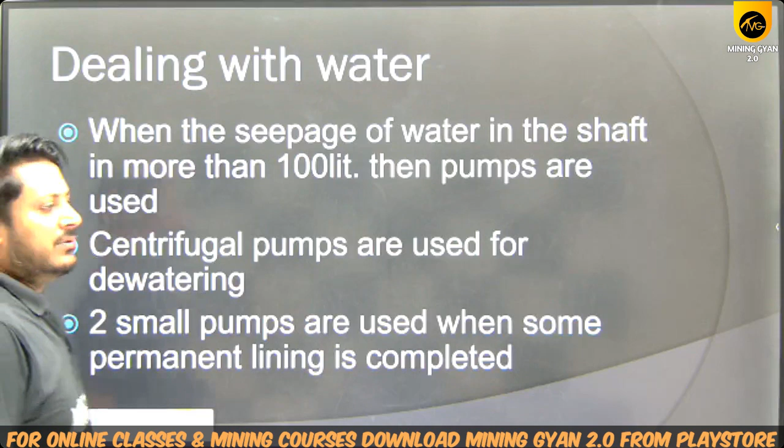So first, our topic today is dealing with water, because water is a major problem which arises during the shaft sinking process. We have to deal with the water while shaft sinking, and for that we have to set up pumps. So what is the condition when we have to set up pumps?

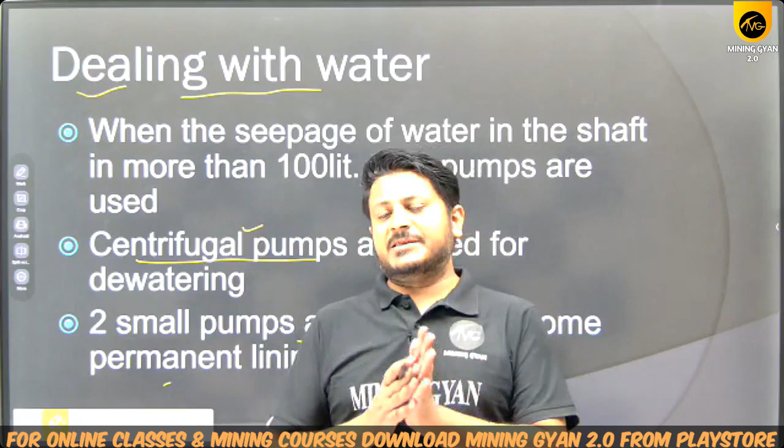If the permanent lining is completed, then in that case two small pumps are used. The pump which is used for dewatering purpose is basically an 8-stage pump, and during the sinking process only 1 or 2 stages of this pump are being utilized.

During sinking, only 1 to 2 stages are utilized out of the 8 stages; the remaining stages are not utilized at that time. The remaining stages are being utilized later on.

Now if we talk about ventilation, what quantity of air must be provided during shaft sinking? It is said that we have to use a forcing fan. We must use a forcing fan of 300 cubic meter per minute capacity, which shall be used during shaft sinking for ventilation purposes.

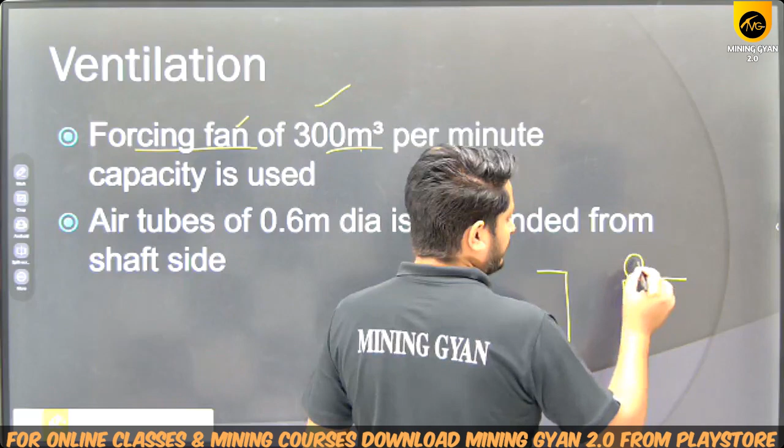From this forcing fan you will provide an air duct, or air tube, for directing the air till the bottom of the shaft. Okay, this will be your whole construction.

Now in shaft sinking we have applied strategies for dealing with the water. The second thing, we have applied strategies for dealing with the ventilation. Now we have to deal with the lighting also, because as the depth of the shaft increases, there will be less quantity of light available at the bottom of the shaft.

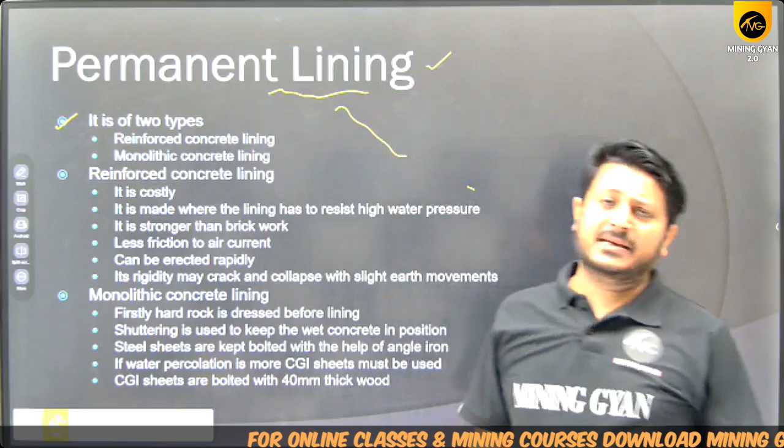Here your permanent lining is basically of two types: reinforced concrete lining and the monolithic concrete lining.

If we talk about the reinforced concrete lining, it is basically very costly. This type of concrete lining, reinforced concrete lining, is basically made in the areas where the make of water is very high and your lining has to resist the high pressure of the water. In such places only this type of concrete lining is made.

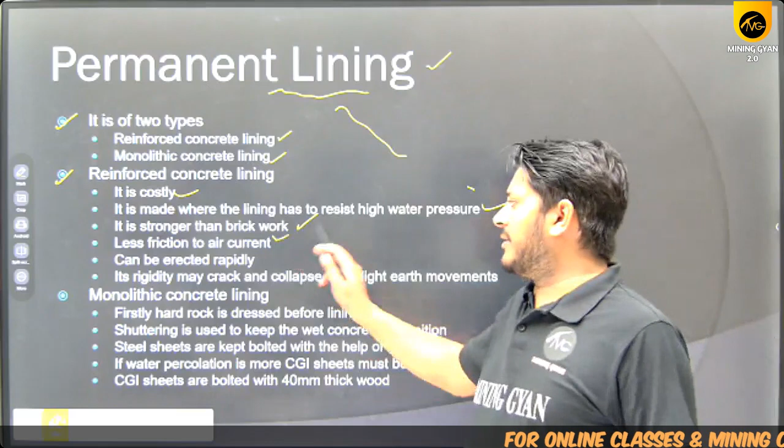After that, it provides less friction to the air current. If the friction to the air current is more, then less quantity of air will reach the bottom of the shaft or the districts after that.

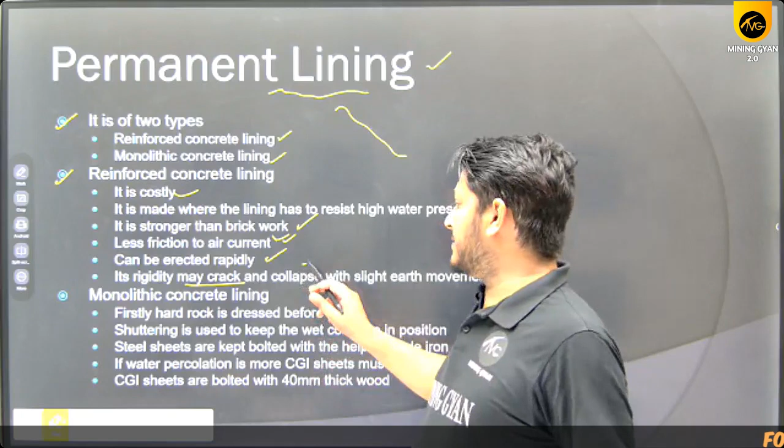But it has a demerit, that it may crack because of its rigidity. It's so strong that cracks can generate in it and it may collapse with slight earth movements.

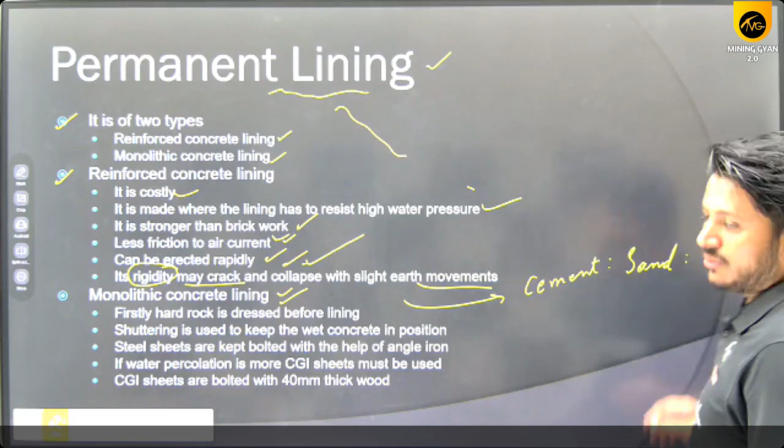Cement, sand, and coarse aggregate are used for the dry shafts. The quantity of these three is mixed in the ratio 1:2:4 to make a slurry, which is then used for the concrete lining or permanent lining.

Talking about the procedure, first the hard rock is dressed before lining, and shuttering is used to keep the wet concrete in position.

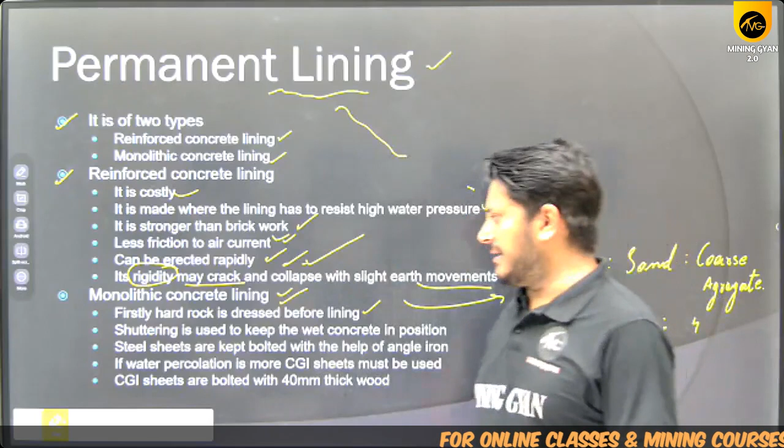Imagine the pillars constructed at your house. In the pillars we provide shuttering, which are basically iron plates. They are used to hold the concrete at its position, holding the concrete in its position.

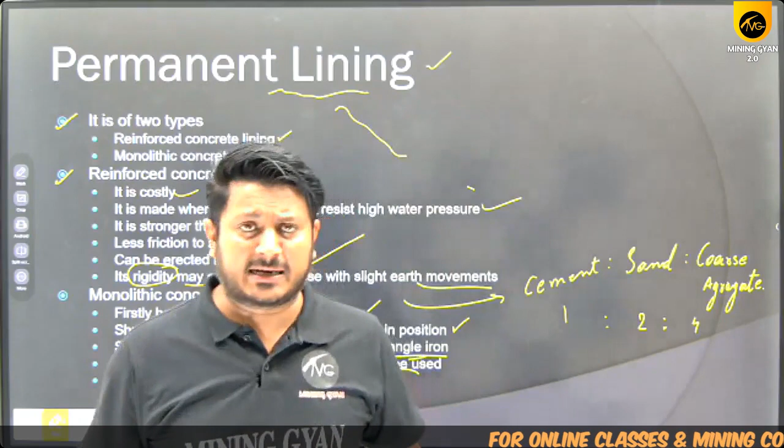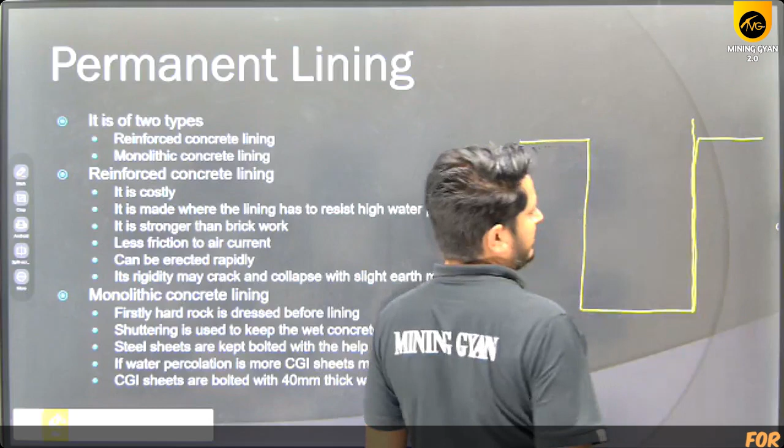Now it is like this. If I draw the diagram, it is something like this. This is your shaft. First of all, a layer of CGI sheet is put over here like this - this is your CGI sheet.

After that, we used to keep the wooden layer - we will provide a thick wood layering, to keep the CGI sheet in its position.

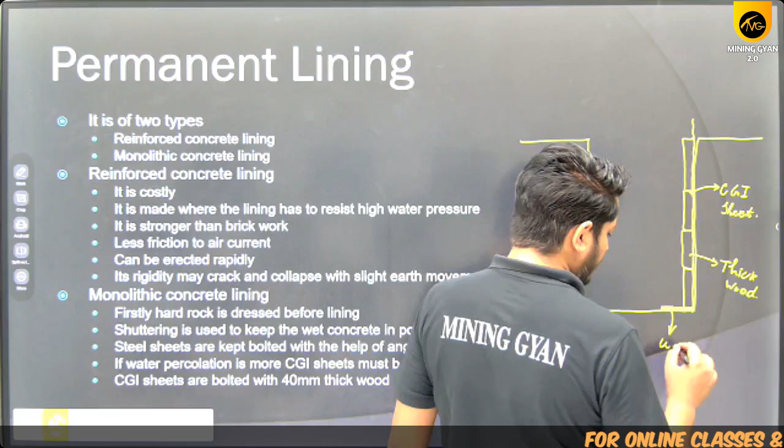After that, we will provide a wedge plate over here. This wedge plate will keep the whole arrangement in position. This will be at the bottom and it will hold the whole arrangement, which will be made on it, above it.

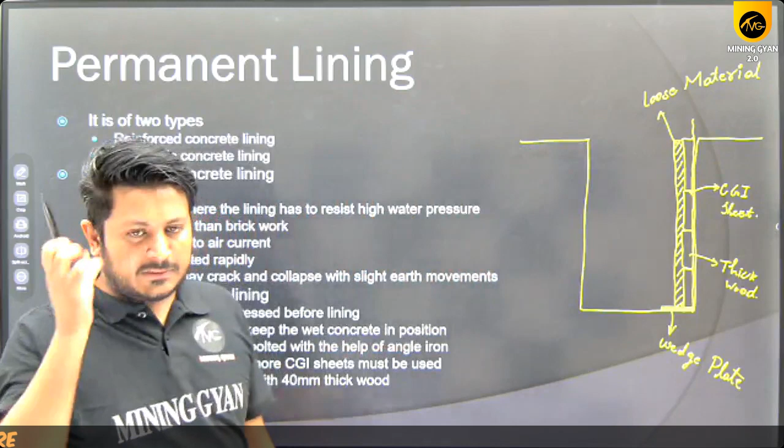Now we will provide the loose material, filling the space with loose material. After that, cement - that is cement, sand, and aggregate. All these things are kept here, and shuttering is provided along the outer portion.

This is your shuttering, and this is your cement. This is the whole arrangement for the permanent lining, the monolithic concrete lining.

Now we have to study about the cast iron tubbing. Would you like to see the cast iron tubbing? This is the cast iron tubbing, or the German tubbing plate. This is a type of plate used during shaft sinking to provide a permanent lining.

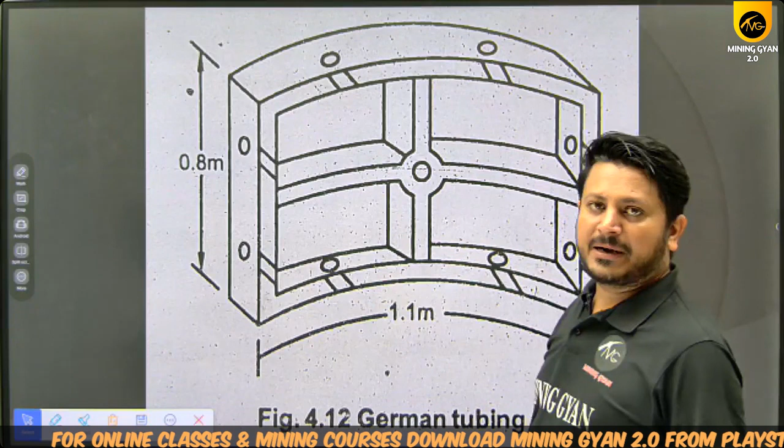This is also a type of permanent lining used in the mines. The portion you are seeing here is the only portion attached on the sides of the shaft, and you can see these holes too. These holes are for the bolting purpose, and this hole is for injecting cement behind the cast iron tubbing.

Cast iron tubbing is also known as German tubbing, and also known as cast iron lining. It is basically a permanent water tight lining.

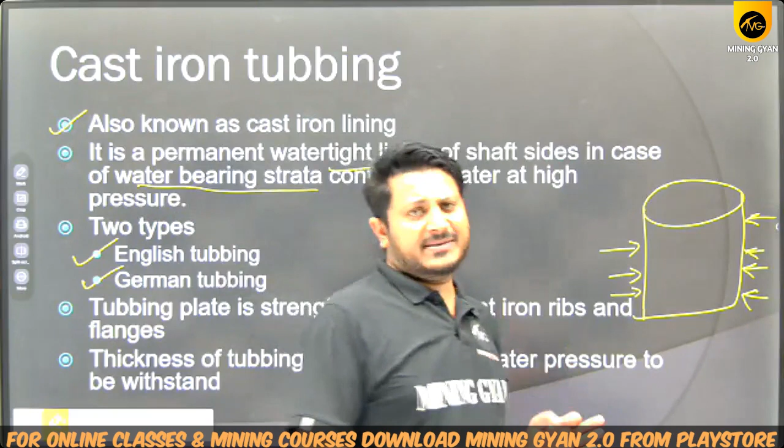Now if we talk about the thickness of the tubbing, then the thickness of the tubbing depends on the water pressure which it has to withstand.

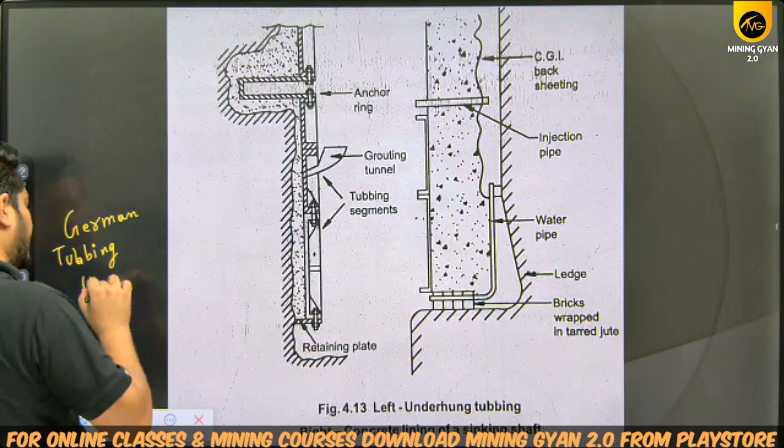Now we have to construct German tubbing in the upward direction. We have to construct the German tubbing for the upward direction, German tubbing upwards.

For this construction, first of all, we have to make a strong level ground. We have to prepare a strong level ground.

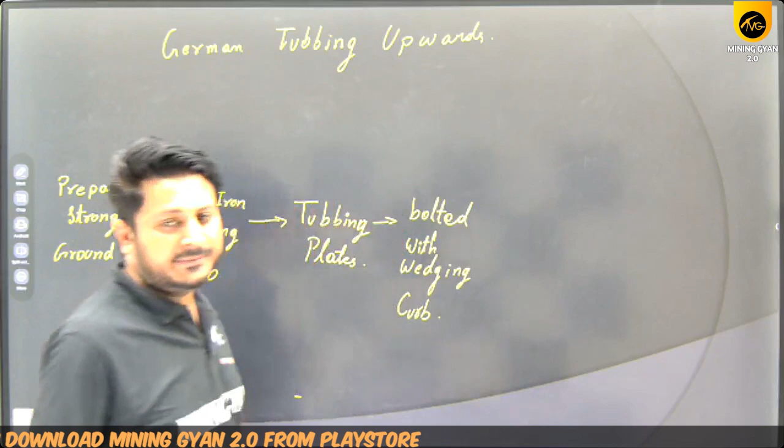Now this is the complete process of placing the cast iron tubbing, German tubbing in the upward direction. For this purpose, after completing one ring, you have to check the center line.

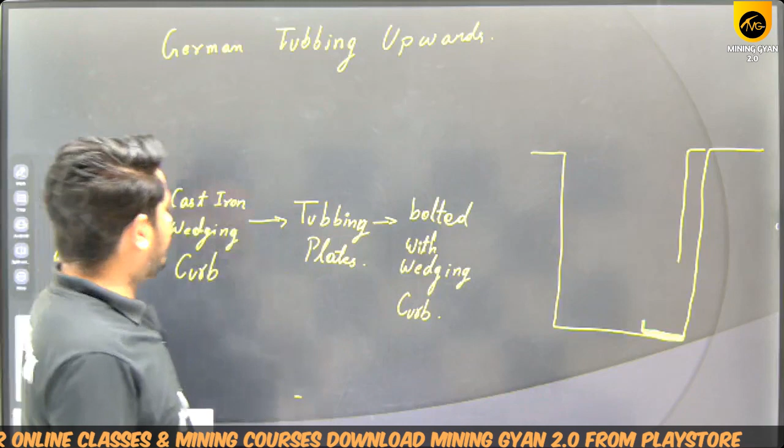We will place a wedging curb over it like this, and on the wedging curb we will place our tubbing plates. In this similar manner, we will complete our one ring.

After that, we will match it, then again we will do the bolting and place another tubbing plate over it. Then again bolting, and another tubbing plate. In this manner, we will complete this whole procedure.

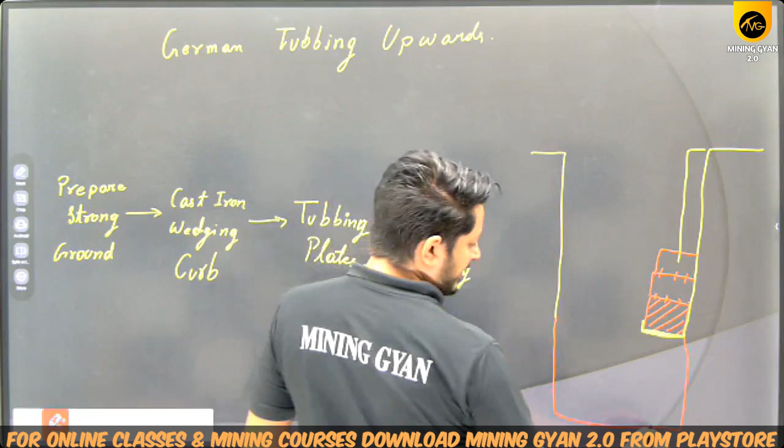After that, we will proceed further and go to more depth, and after that again we will prepare a ground and follow the similar procedure.

अब यहाँ पर हम क्या कर रहे हैं, एक हमने ग्राउंड बनाया, लेवल ग्राउंड, उसके ऊपर वेजिंग कर्व डाला, वेजिंग कर्व के ऊपर टबिंग प्लेट्स को जमा दिया। जैसे ही ये पूरा कंप्लीट हो जाता है तो फिर उसके बाद हम फिर से शाफ्ट सिंकिंग करते हैं। After that we will provide temporary lining, and after we have reached a particular depth, we will again follow the same procedure as done earlier. In this manner you can do the upward direction German tubbing construction.

Now, after every 20 meters interval, extra curb is provided. It depends basically, if you are providing the extra curb, on the nature of the strata.

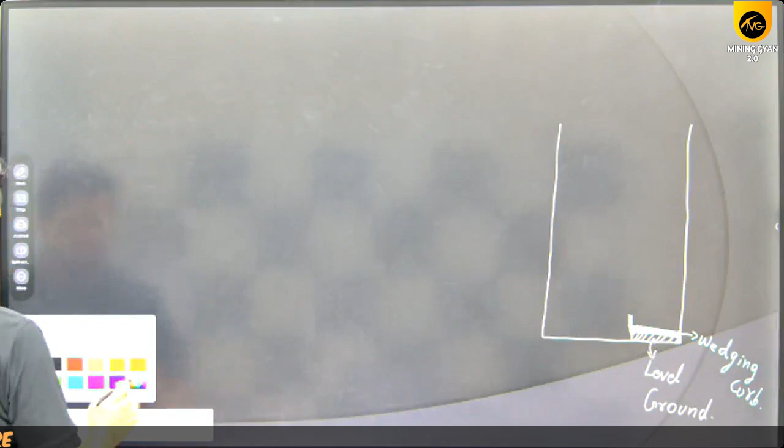Level ground. After that, this is your wedging curb. German tubbing. Similarly, all the German tubbings are placed one above the other by bolting.

After a 20-meter interval, we will provide the wedging curb again for extra support. This 20-meter interval distance depends on the nature of the strata. Remember this thing.

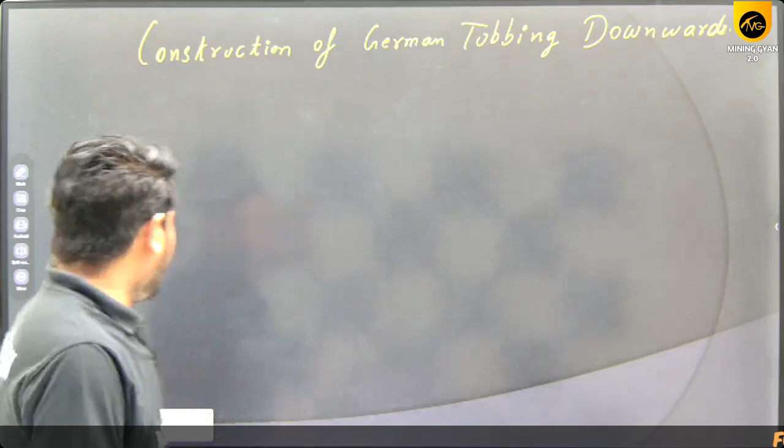यहाँ पर इन्वर्टेड वेजिंग कर्व या फिर जो एंकरेज रिंग है उसको लगाया जाता है, टबिंग को उससे सस्पेंड कर दिया जाता है. अब यहाँ पर मैं एक डायग्राम दिखाता हूं. ये देखिए,

यहां पे फर्स्ट ऑफ ऑल आप एक इन्वर्टेड एंकरेज रिंग लगाएंगे। इन्वर्टेड जो है वो वेजिंग कर्व लगाते हैं या उसको एंकरेज रिंग भी कहा जाता है। दिस इज योर इन्वर्टेड, ये है एंकरेज रिंग। अब इस एंकरेज रिंग की मदद से, जो मेरा जर्मन टबिंग है, उसे यहाँ पे बोल्ट की मदद से अटैच करके इस प्रकार लटका दिया।

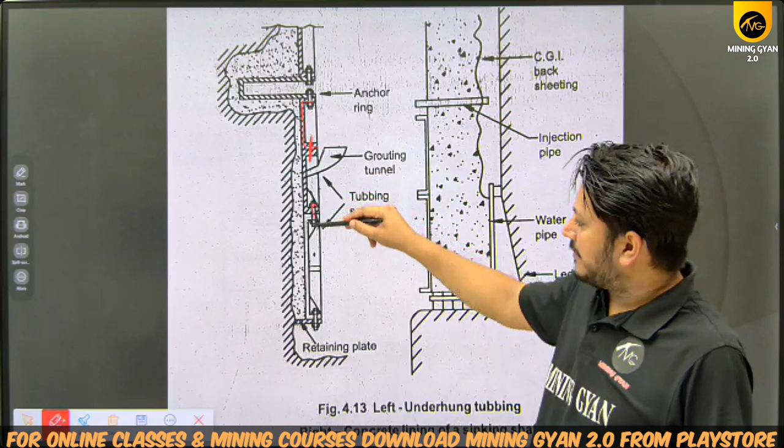एंकरेज रिंग डाला पहले शाफ्ट के साइड्स में। First in the shaft sides I have inserted the anchorage ring. After that I will do the bolting of the German tubbing segment with this anchorage ring, and after that two German tubbings will be bolted together. In this manner these German tubbings will be bolted together, and finally I will insert a retaining plate in the shaft side, and on that retaining plate the last German tubbing plate will be joined with the help of the bolt, the bolting system.

तो यहां पर हम एक इन्वर्टेड एंकरेज रिंग डालते हैं जो कि इसके अंदर पूरी तरह से घुस जाता है, इस तरीके का कुछ दिखाई देता है। अब इससे जो मेरा जर्मन टबिंग है उसको बोल्टिंग करके लटका दूंगा, ऐसे लटकता हुआ एक दूसरे से चला जाएगा। पहले तो एंकरेज रिंग से जुड़ा रहेगा, उसके बाद एक दूसरे से बोल्टिंग करके इनको अटैच कर दूंगा। फिर फाइनली नीचे एक्स्ट्रा सपोर्ट के लिए retaining plate is placed or inserted into the shaft side, and this will support the whole system.

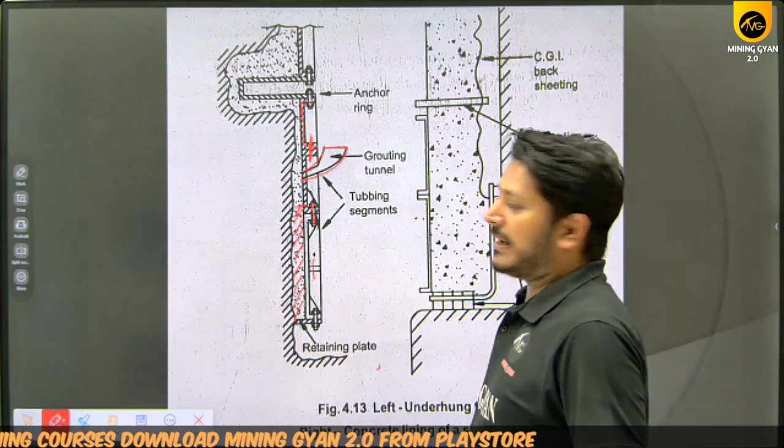Now in this German tubbing segment I will place a grouting funnel. This grouting funnel will fill the gap between the German tubbing and the undulating shaft side. This gap will be filled with the help of the grouting funnel. So the tubbing is suspended with the anchorage ring, and after that finally it is supported from the bottom with the help of the retaining plate.

The distance which is maintained from the shaft bottom is approximately 1.2 meter to 1.8 meter. This distance is constantly maintained from the shaft bottom. Now which thing is used to fill this gap? Here the thing which is used to fill this gap is the cement, for extra support.

Okay, cement is filled over here.

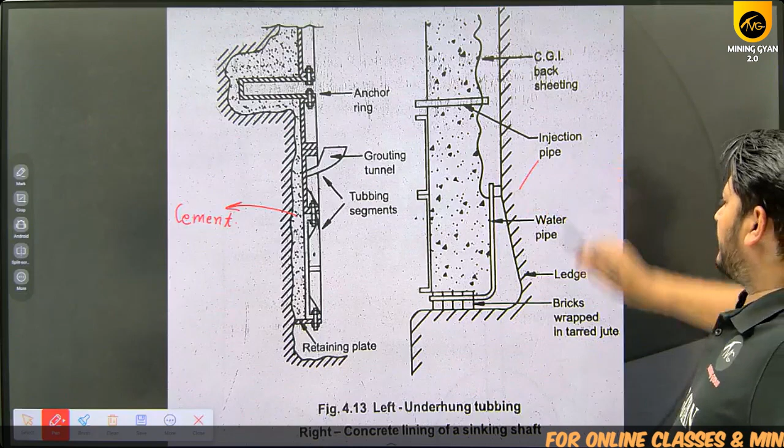This is the concrete lining of shaft sinking, where CGI sheet is placed. After that, shuttering is done, and the gap is filled with cement with the help of an injection pipe. This is your shuttering, and at the bottom, this is your ground, and behind the permanent lining a water pipe is placed. From this water pipe, all the water which gets percolated behind the CGI sheeting comes out and goes to the shaft bottom.

ठीक है, अब यहाँ पर हमने जो पढ़ा था शाफ्ट सिंकिंग में कंक्रीट लाइनिंग, तो सीजीआई शीट लगाया, उसके बाद शटरिंग लगाया और बीच में पूरा मटेरियल भर दिया, यहाँ पे वाटर पाइप प्रोवाइड किया ताकि जो भी वाटर प्रेशर क्रिएट होता है वो रिलीज होता रहे, और वाटर लगातार यहाँ से शाफ्ट के बॉटम में चला जाता है।

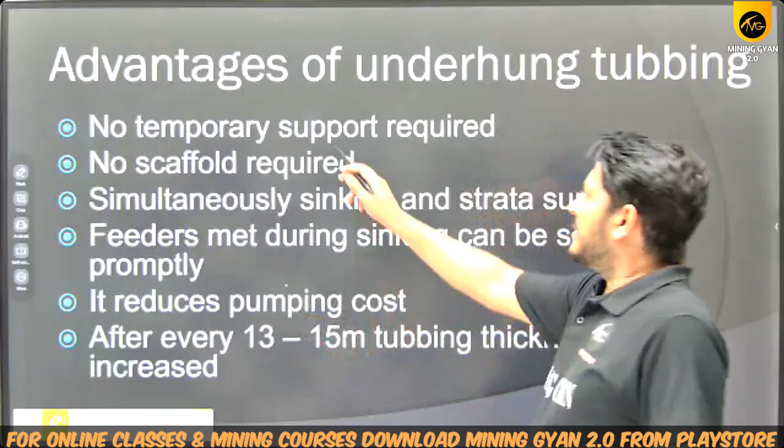एंड एडवांटेजेस ऑफ अंडरहंग टबिंग। अंडरहंग टबिंग के एडवांटेजेस क्या है? सबसे पहला एडवांटेज ये है कि इसके लिए आपको किसी प्रकार का टेम्पररी सपोर्ट की जरूरत नहीं पड़ती है। In underhung tubbing, we do not need to provide any type of temporary support, it is not required.

Scaffold is not required. Simultaneous sinking and strata support is possible in this case, मतलब कि जो सिंकिंग कर रहे हो शाफ्ट की, वो और साथ-साथ में जो सपोर्टिंग का काम है, वो दोनों एक साथ हो सकता है।

ठीक है, अब जो भी आपके फीडर्स मिलते हैं, व्हाट डू मीन बाय फीडर्स? The cracks from where the water gets percolated in large quantity, you can seal those feeders at the time of shaft sinking only, and it reduces the pumping cost. If you are sealing these feeders, your pumping cost will get reduced, and after every 13 to 15 meters of tubbing, the thickness of the tubbing is increased. You have to remember this thing.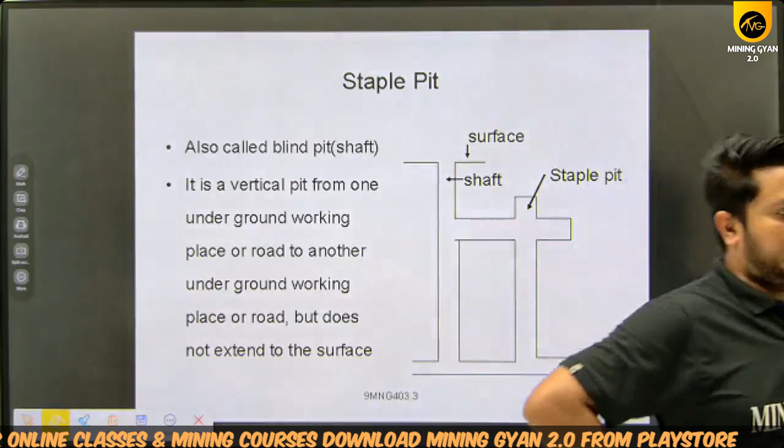अब देखिए, upward drivage of shaft - you have to drive the shaft in the upward direction. Basically, upward drivage of shaft is done in metal mines only. Up to a 15 meter distance the upward drivage of the shaft is done normally, but after that some special methods are applied, though we will not see about those methods.

We will just know about the staple pit. What is staple pit? Staple pit is a shaft which does not reach the surface, but is used to join two levels in underground mines. It is a type of vertical shaft used to join two levels in underground mines, but this type of shaft does not reach the surface. That's why its name is called staple pit.

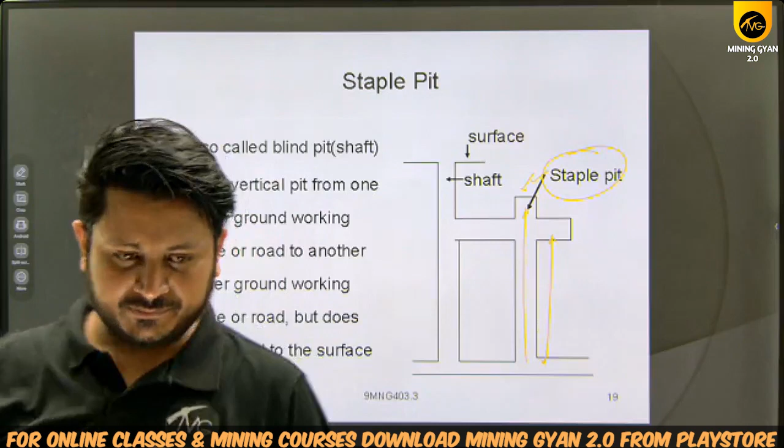For the extra support, cement is only used as a filling. Now, if we talk about the special methods of shaft sinking, shaft sinking में special methods total 4 हैं। Those 4 special methods are piling system, Caisson method, freezing method and the cementation process.

Okay, cementation process। अब इसमें होता क्या है, जो पाइलिंग सिस्टम होता है, कैसन मेथड 3 प्रकार का होता है। Caisson method is of 3 types, that is the sinking drum process, the open caisson method, forced drop shaft method, and the pneumatic caisson method. Now let's talk about the piling system.

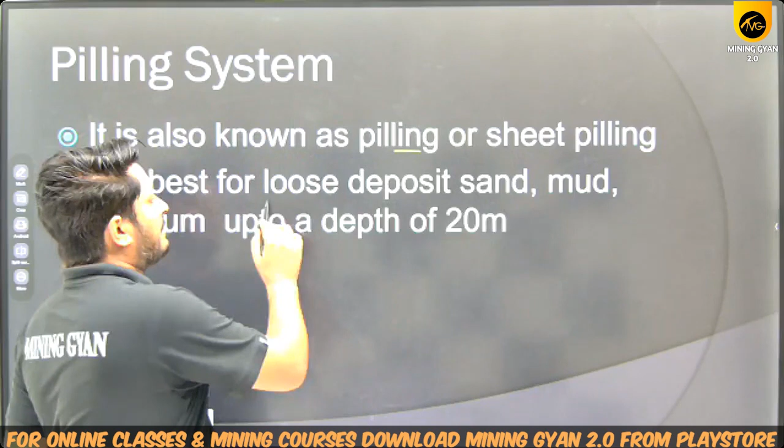पाइलिंग सिस्टम को पाइलिंग या शीट पाइलिंग के नाम से भी जाना जाता है। It is also known as piling and sheet piling। ये मेथड आप कहां यूज करेंगे, जहां लूज डिपॉजिट ऑफ सैंड है, मड है या एल्यूवियम है। 20 मीटर की गहराई तक, up to 20 meter depth, if there is the presence of loose ground that is sand, mud or alluvium, then in that case the piling system or piling method of shaft sinking is the best method that you can use.

Okay, और 6 मीटर से 10 मीटर की लंबाई वाले पाइल्स होते हैं इसमें, जो इंटरलॉक करके ज्वाइन किए जाते हैं। सबसे अच्छी बात यह है कि ये वाटर टाइट होता है, it will not allow water to enter into the shaft. Up to 6 to 10 meters is the length of the pile, and each pile is joined with the help of an interlocking system.

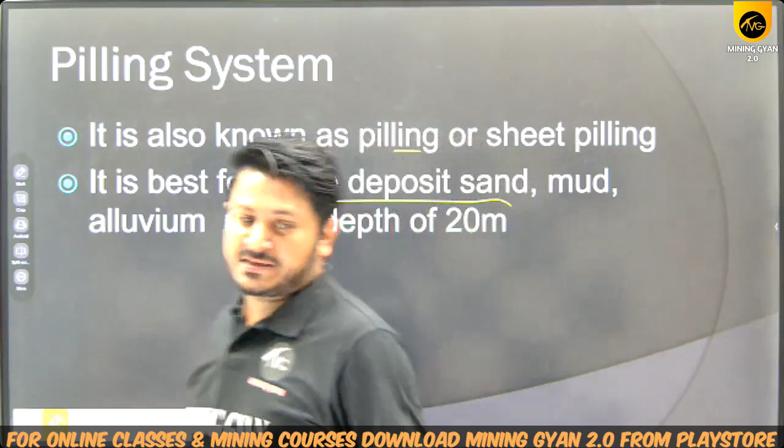And the best thing is that it is a watertight system or watertight method. Now as you can see in the image, this is your piling system.

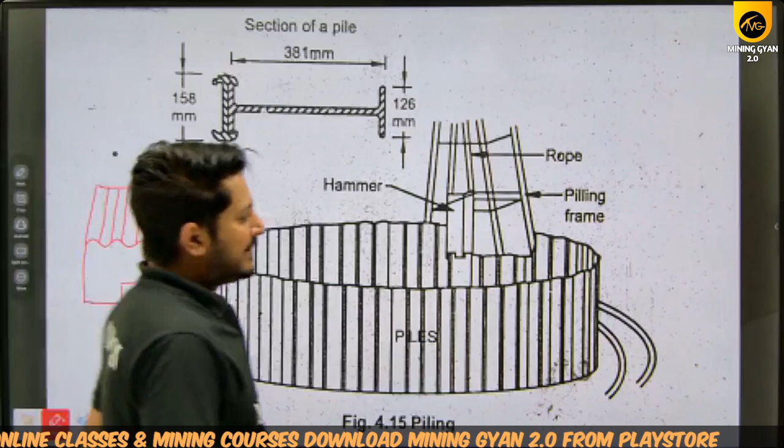Maybe you have seen this type of houses having such type of sheets over it. Such type of sheets are placed over the houses. This type of sheet is also used in the piling system.

This type of sheet is used in the piling system, and it is forced down to cut the ground and make a shaft, and the soil, mud, alluvium soil or sand present in the center will be excavated with the help of the excavator and raised with the help of the bucket.

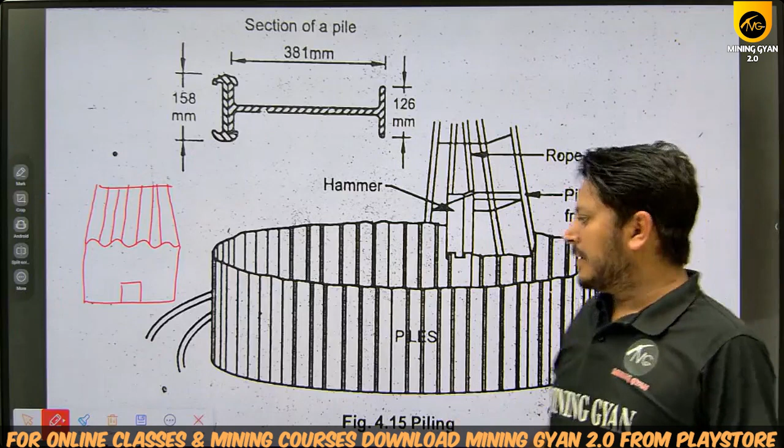Now the next method is the Caisson method. In Caisson method we have to sink a drum. Just remember, in Caisson method I have a drum, and I have to sink that drum.

Now for sinking that drum I have different methods. In Caisson method you have to just remember one thing, that we have a drum and we have to sink it, and for sinking it we have three methods. First method is the sinking drum process or the open caisson method.

In this method we will provide - okay, we will study all three methods in a short and precise manner. First of all, what we will do, we will provide a cutting shoe at the bottom of this drum.

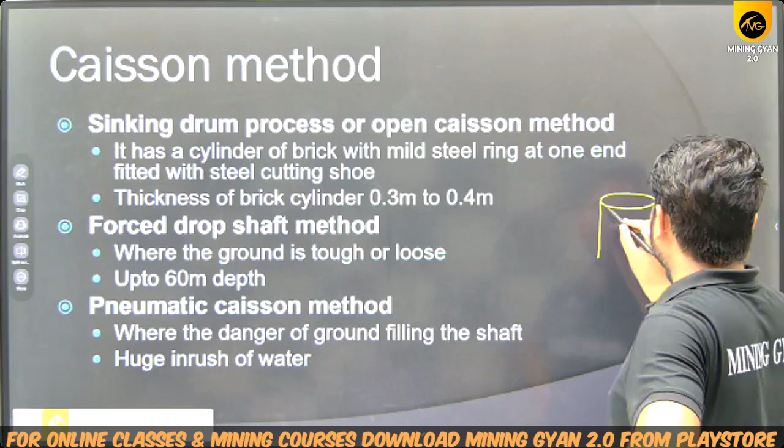We will provide a cutting shoe at the bottom of this drum - we will provide a cutting shoe at the bottom of the drum, like this will be our cutting shoe. This cutting shoe, as it will go down, it will just cut the ground and make the shaft.

It is fitted with a cutting shoe at the bottom, and the cylinder is made up of brick. This cylinder is made up of brick, and the thickness of this brick cylinder is approximately 0.3 to 0.4 meter. And this cutting shoe is made up of mild steel.

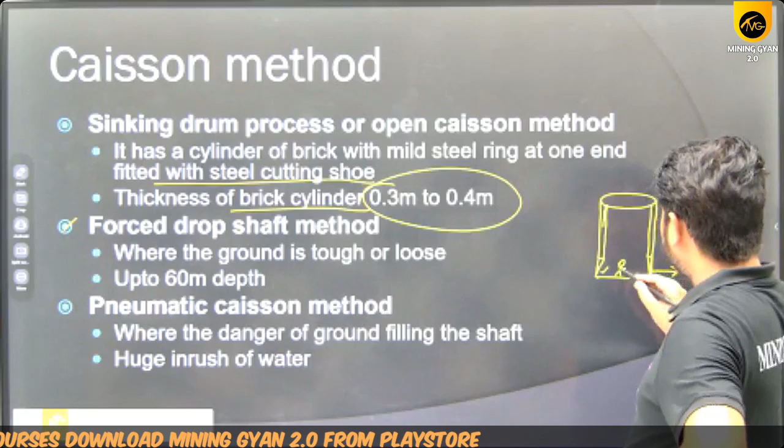Now the second method - then the question arises, sir, how will it go down, how will it cut the ground? As soon as you excavate the shaft, suppose you are working at this portion of this shaft.

As you will excavate the shaft, it will automatically go downwards due to this cutting shoe, and due to the weight which is being provided on top of this, at the top of this cylinder. Due to the weight of this cylinder, this cutting shoe will automatically move downwards as you excavate at the bottom.

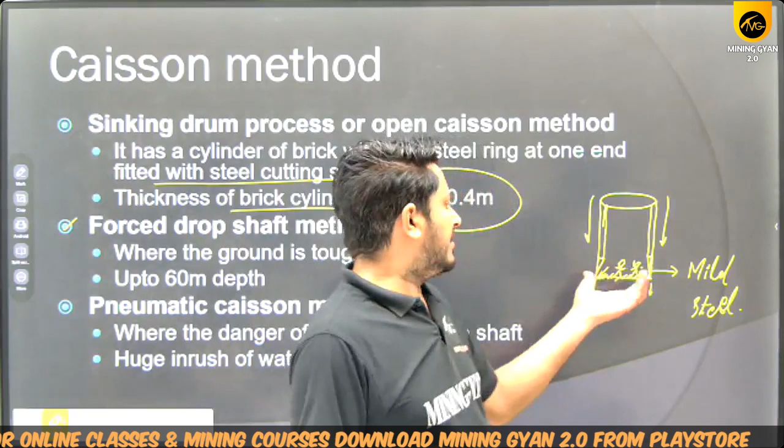Now the next method which we can use is the forced drop method. In this method, where the ground is tough or loose, this type of method can be used, because due to friction, if we are using the sinking drum process, this drum will not go automatically downwards.

Then in that case, what we have to do is we will take the drum and force it down. We will hang it at the top, at some distance from the ground, and after that we will leave it. It will freely fall on the ground and make a hole at that place.

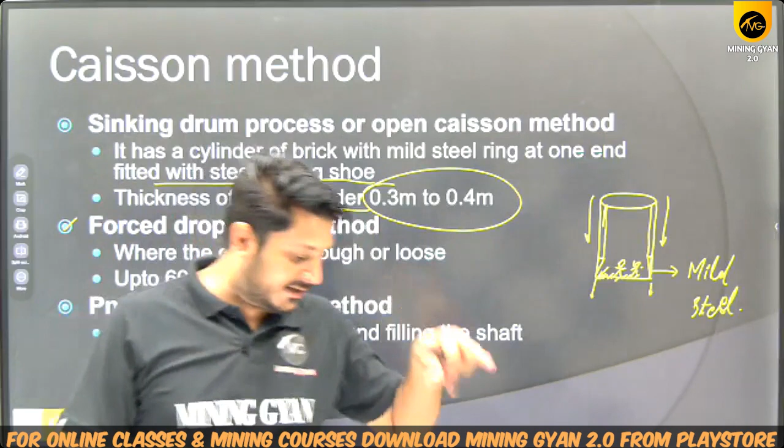When the drum is not able to move into the ground due to its weight, then in that case we will use the force drop method, where we allow this drum to fall freely on the ground, so that it can make an excavation point or get inserted into the ground, for the shaft sinking process. This method is successful up to 60 meter depth.

Now where the ground is too tough, and where there is a danger of ground filling the shaft due to heavy inrush of water, in that case the pneumatic caisson method is used.

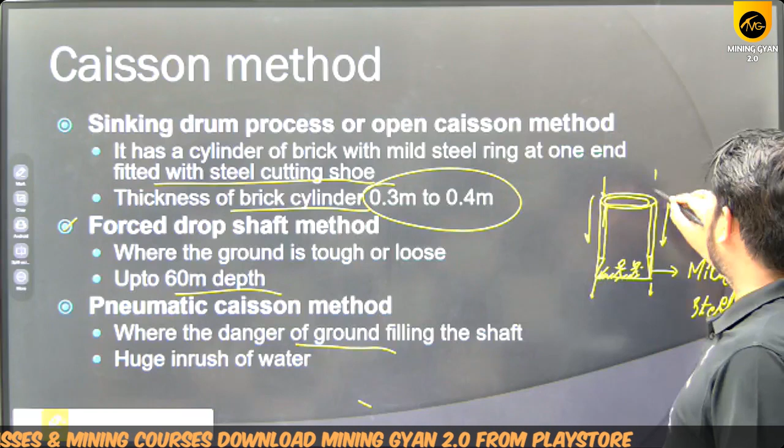Basically, in this method we will form chambers, and with the help of those chambers we will provide force to this drum with the help of compressed air. We will force this drum in the downward direction with the help of compressed air coming from the chambers. Now we are just trying to inject this drum with the help of the compressed air.

So first of all, in the first method this drum goes automatically due to its own weight. In the second method we are just dropping it freely so that it could go into the ground with the help of that force. And the last method is the pneumatic caisson method, in which we are providing compressed air, inserting it with the help of compressed air. These are the three methods of the caisson method.

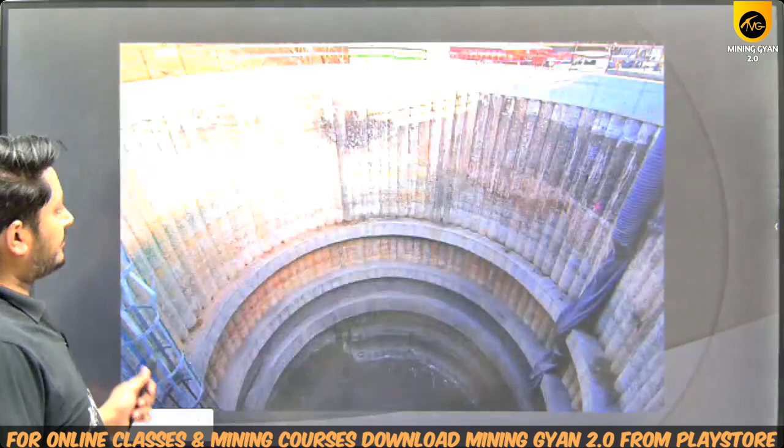This is the force drop method.

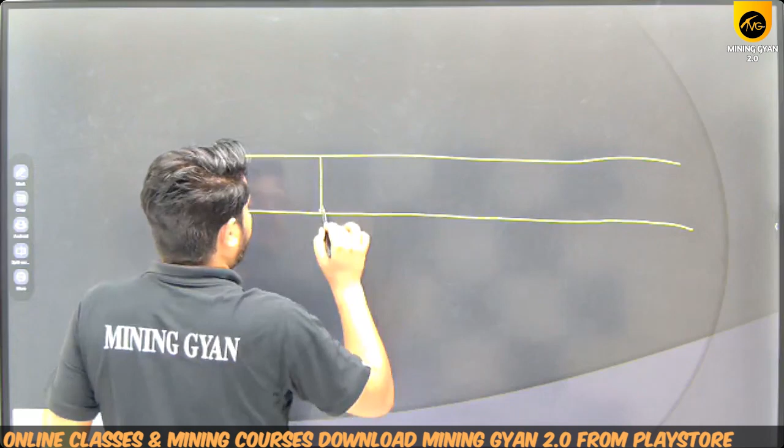This is ice having a thickness of up to 6 meters, just suppose that ice, and below this ice water is present, and after that there is ground, and below that ground there is a deposit of gold, this much big deposit of gold.

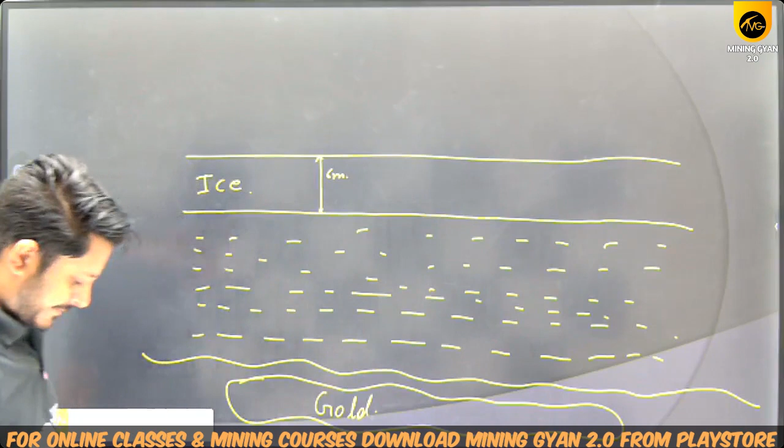Now you have to reach here with the help of shaft sinking. So first of all, what you will do is from the surface you will insert a pipe in this manner.

And in this pipe you will fill it with the cold brine solution. Therefore it consists of three operations.

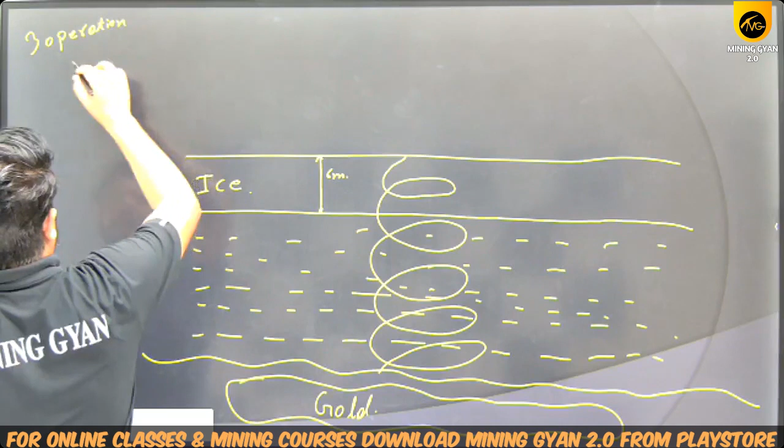The first operation is to drill holes of approximately 150 mm diameter. First of all what you have to do is drill holes of 150 mm diameter over here.

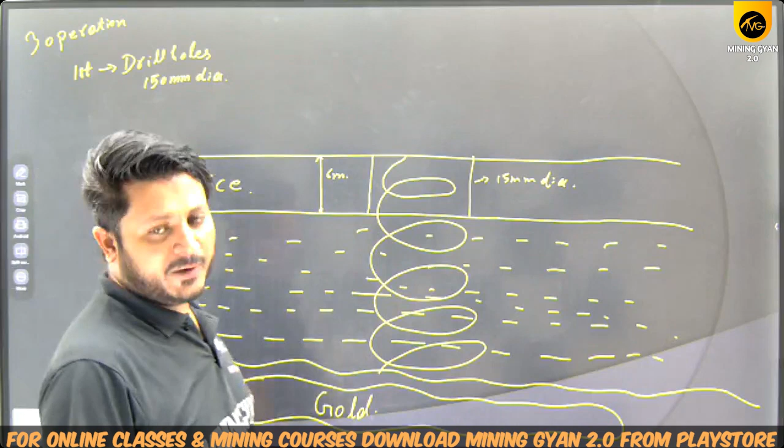The interval between these holes will be set as you drill holes in a circular, ring manner. The holes will be 150 mm diameter, and the interval between the two holes will be around 2.2 meters, around 3 meters around the shaft.

Now we will insert some special tubes inside these holes. After this will be the second operation, in which we will fill these holes with the cold brine solution.

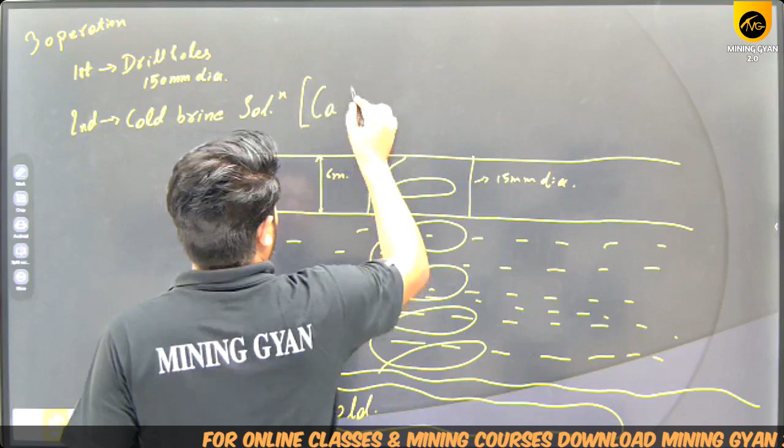We'll fill these holes with the cold brine solution, which is basically CaCl2. It will basically make a thick wall of ice.

This will create a thick wall of ice in the surrounding strata. Around the area, it will form this thick wall of ice, creating a complete wall up to this point.

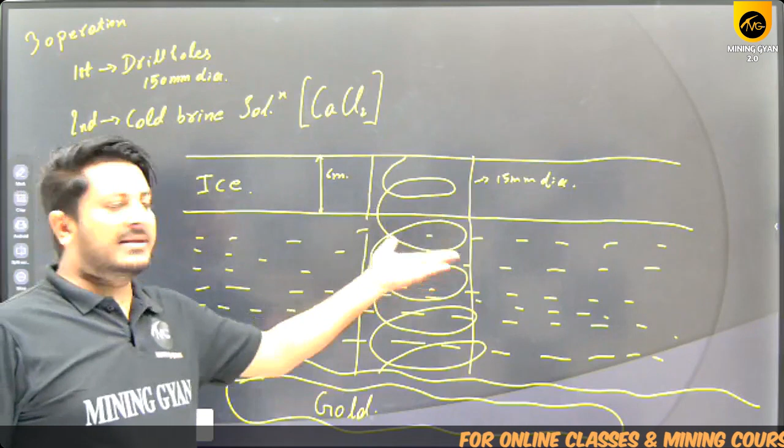Until and unless this cold brine solution keeps rotating or moving in these pipes, the hard strata or thick wall created by you will remain at its position as a shaft, in the form of shafts, and you will take out the whole thing from inside this shaft, so that you can take out the gold from this position.

Now the third operation arises here. What is the third operation? After you have completed your mining process, then what you will do is insert the hot brine solution. You will inject the hot brine solution, which will remove the thick wall of ice. This injection of hot brine solution is called thawing.

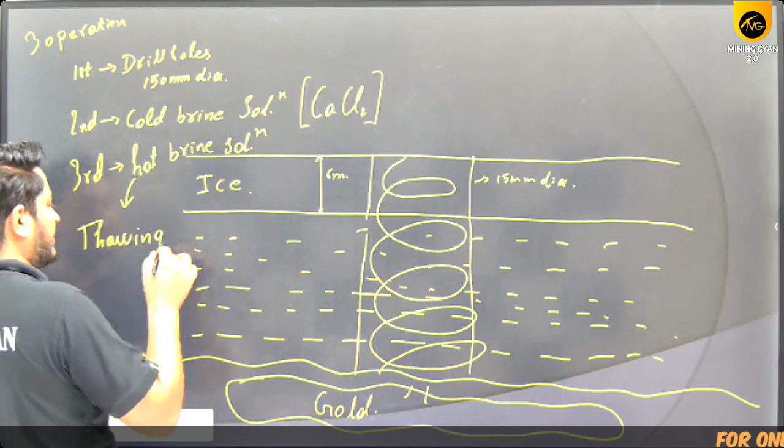Clear? Now the last method is the cementation process.

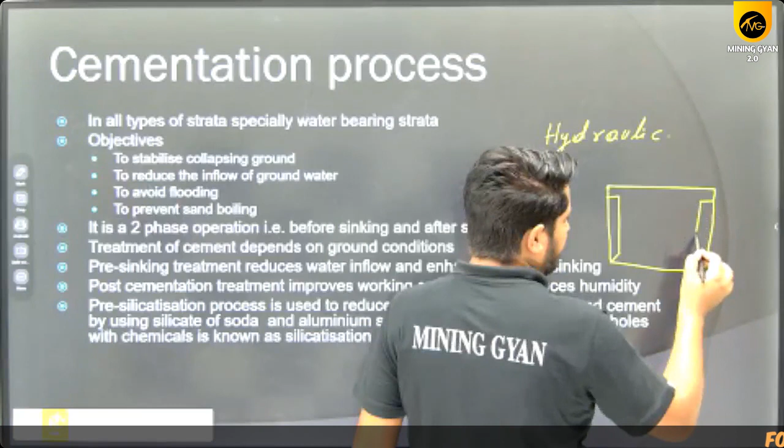Okay, how? Suppose this is your shaft. At the top, I will provide such an arrangement - suppose this is your hydraulic. As this hydraulic expands, this will automatically go downwards. This type of arrangement is also provided in the forced drop method.

Basically, this cementation process is used in each and every type of strata. Its main objective is to stabilize the collapsing ground, reduce the inflow of groundwater, avoid flooding, and prevent sand boiling.

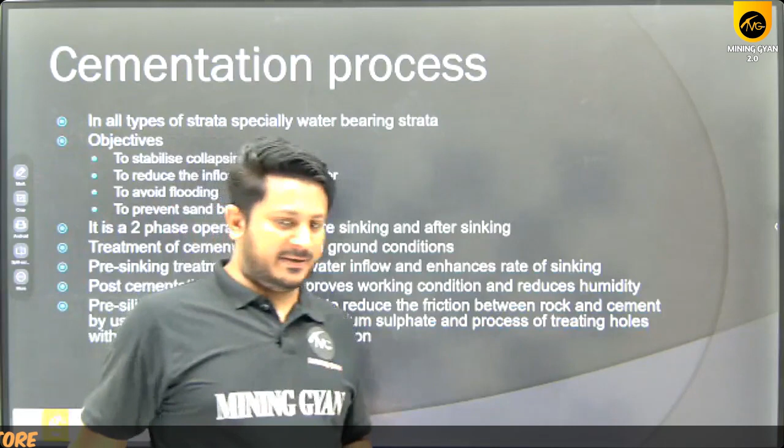In the pre-sinking treatment, first of all what we will do - the pre-sinking treatment reduces water inflow and enhances the rate of sinking. First of all we do the pre-sinking treatment. The advantage of pre-sinking treatment is that the water - for example, we are making the shaft, and while shaft sinking...

What happens is there is heavy inrush of water, I don't want these things. I don't want all this water that comes flowing in heavily, so I will do something so that water cannot come inside at all. I have to make some arrangements due to which the water should not come inside the place where I am going to work. So first what we have to do is the pre-sinking treatment.

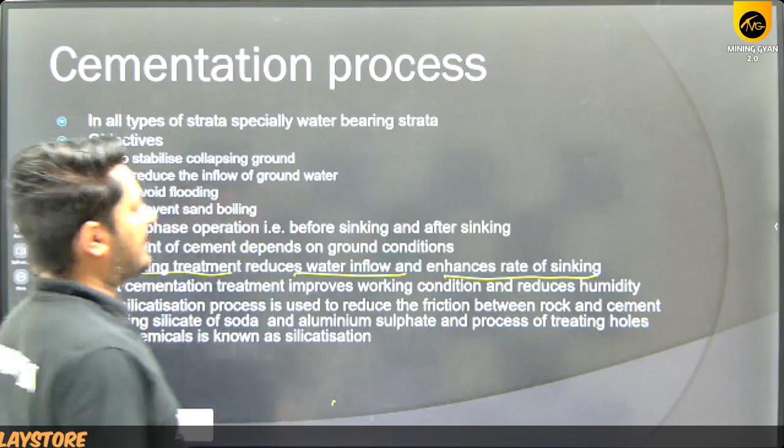In the pre-sinking treatment, what do you actually do? Suppose we have to make this shaft. Now, from the surface we will drill holes around the shaft in this manner, and we will inject cement inside this.

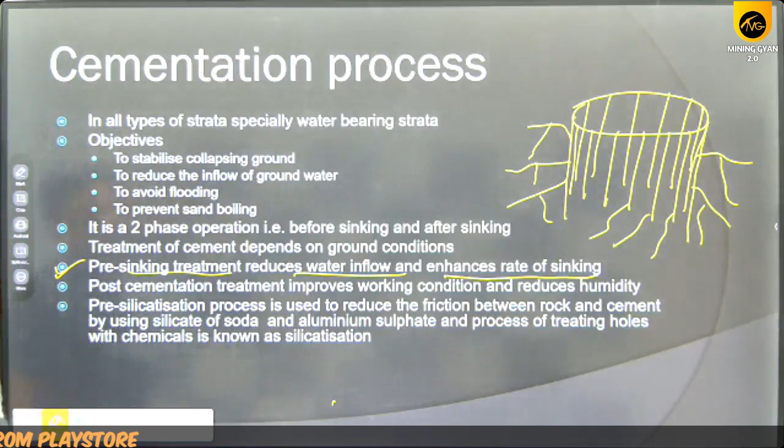After injecting the cement, the cracks or voids from where there was heavy inrush of water will all be filled up with this cement. Whatever cracks are there in the strata will be filled with the injected cement, so there will not be any inrush of water. This is the pre-cementation, pre-sinking treatment. Now we have to do the post cementation treatment.

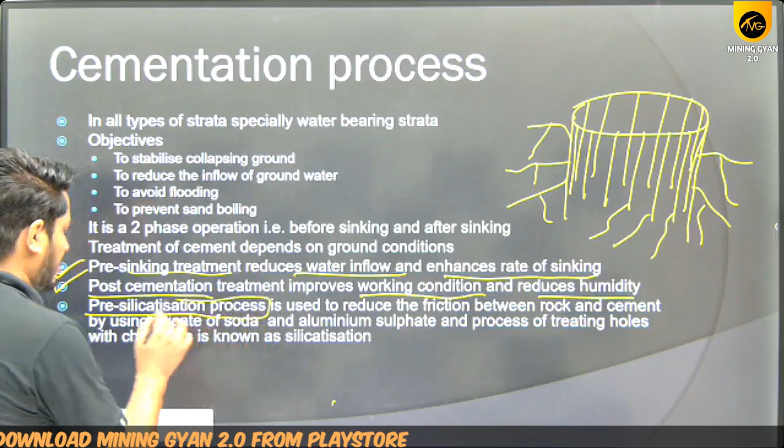Basically it improves the working condition and reduces humidity. Even after shaft sinking, water will come from somewhere, and we have to stop that inrush of water to improve the working condition and reduce humidity. For this, what we have to do is the post cementation treatment, that is, we will use the pre-silicatization process.

In the pre-silicatization process, it is a process which will reduce the friction between the cement and the rock. Why or how does it reduce the friction between rock and cement? Just suppose that you have made a shaft.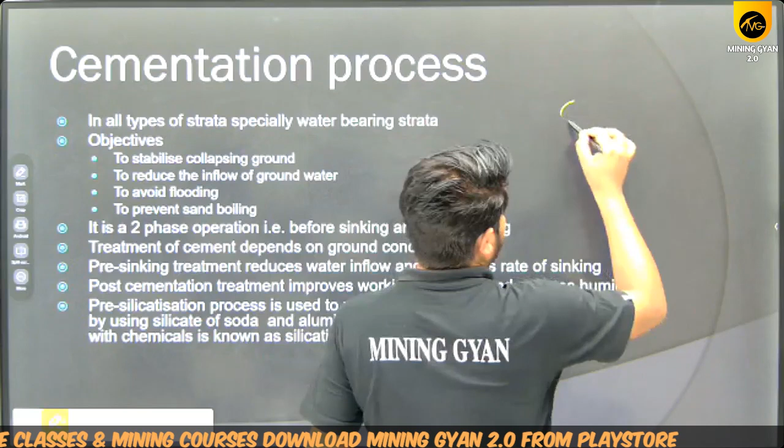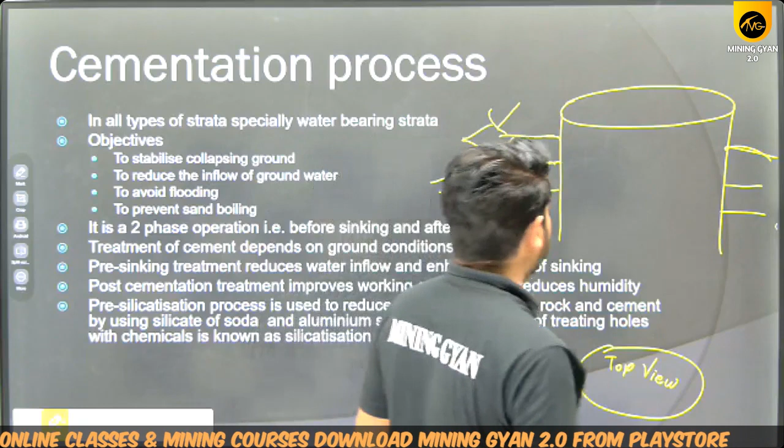This is your shaft, front view, and this is the top view. I will drill this type of holes in the shaft at the sides of the shaft. When I drill these holes, they will be connected to some other cracks which are present in the strata, developed due to the shaft sinking process, blasting, or any other process.

What I will do is fill these holes with cement. Suppose in the top view, holes are drilled like this in the surrounding of the shaft, and these holes will be connected to some sort of cracks present in the strata, in this manner.

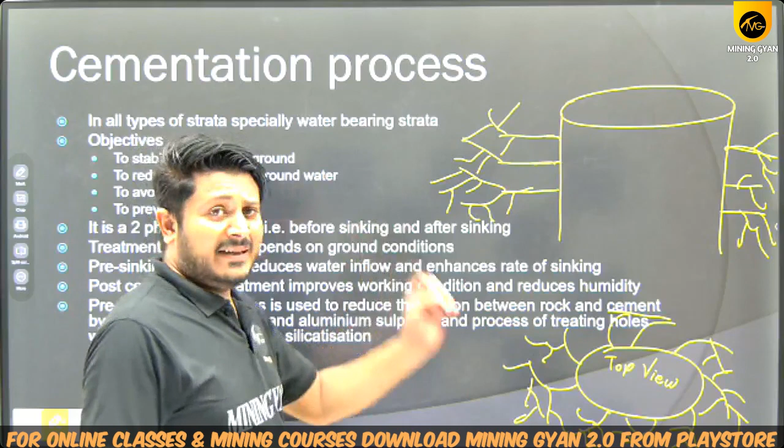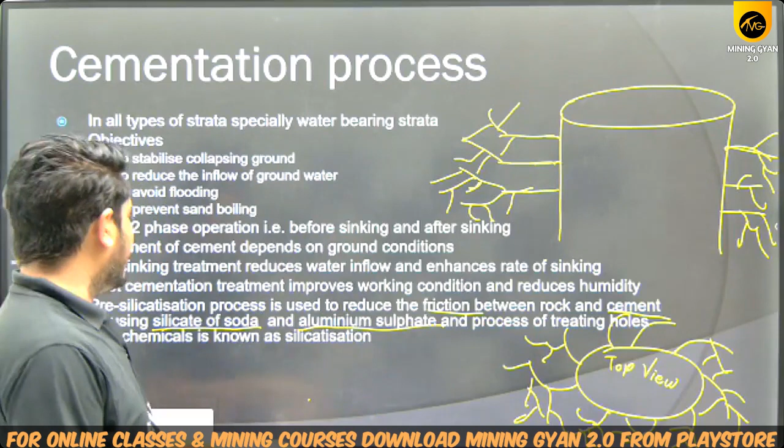Now the question arises: will the cement flow easily into these cracks present between the rocks? It may not be possible for the cement to flow in a very easy manner inside these cracks, so what we will do is reduce the friction. If the friction between the cement and the rock is reduced, then the cement will easily flow inside the cracks. For that purpose, we mix silicate of soda and aluminum sulfate into the cement, to help reduce the friction so that the cement can easily flow into the cracks.

This treating of holes with the chemicals is known as silicatization. So this is the complete process of shaft sinking.

I have discussed each and every process. The last thing, it's not that important, but these are the processes which we have to remember.

But if we talk about the Kolkata and Mumbai projects, in these projects basically a reamer is used. A reamer is a heavy drilling boring machine. With the help of that reamer, you drill the holes, and after that whatever material has to be taken out, you can take it out, if it is for fuel purposes, for taking out crude oil.